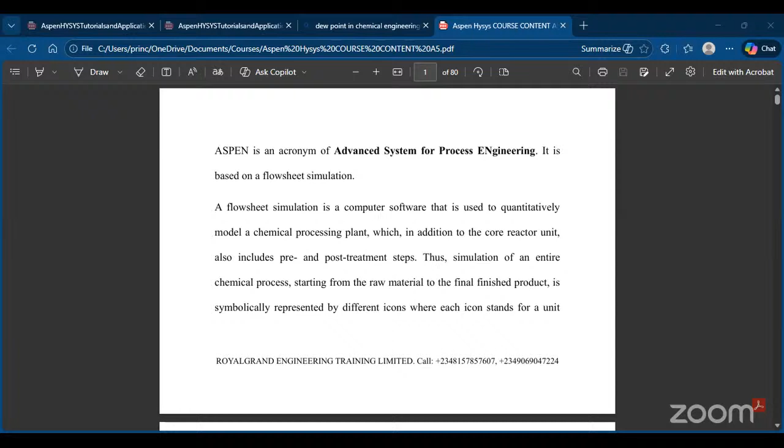Okay, so let's go back to the topic for today, which is Aspen HYSYS. Aspen is an acronym for Advanced System for Process Engineering. It is based on flow sheet simulation. So basically, when you hear about Aspen HYSYS, just know that its principle is flow sheet simulation. Then, what is flow sheet simulation? Flow sheet simulation is computer software used to quantitatively model a chemical processing plant, which, in addition to core reactor units, also includes pre and post treatment steps.

So let's define flow sheet first. A flow sheet is simply the steps involved in a process. For people into software engineering, before you develop your software, you also need to develop a flow sheet. A flow sheet is simply a diagrammatical process of how you solve a problem from start to finish. So in process engineering, your feed, how it moves from the start point, the inlet, up till the exit, where you get your final product. Aspen HYSYS models that. That's why you have your PFD, your process flow diagram. The flow from the input to the output, that's simply what a flow sheet is.

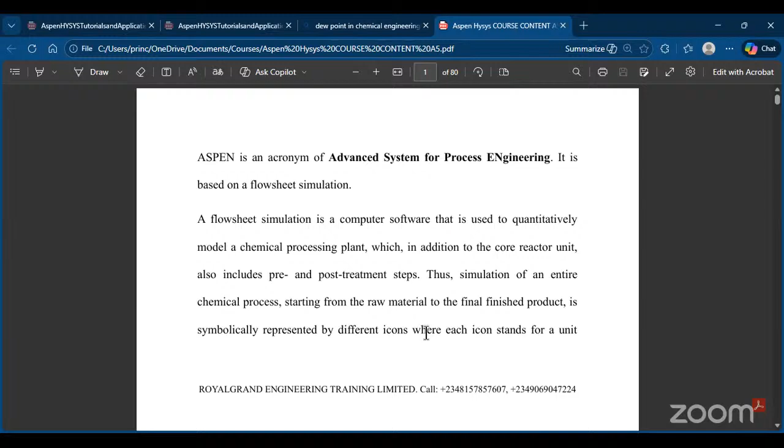And there are different types of flow sheets. You have your PFD, P&ID, utility flow diagram, which is UFD, and there are a lot of them. There's BFD, which is block flow diagram. In CH202 or 204, I think people are supposed to be introduced to process flow diagrams. Okay. So simulation of an entire chemical process, from the raw material up to its finished product, is symbolically represented by different icons, where each icon stands for a unit operation.

Okay, I would like to ask, you are chemical engineers, what's the difference between a unit operation and a unit process? I would like you all to drop your answers in the comment section. Unit operation and unit process. What's the difference? Okay.

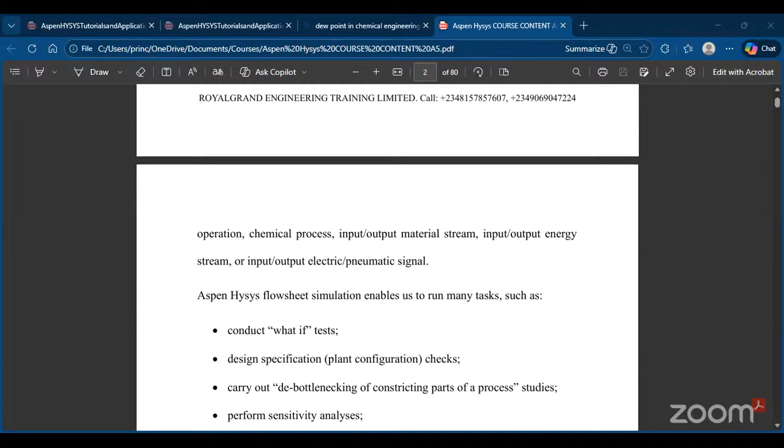Each icon stands for a unit operation, chemical process, input and output stream, input and output energy stream, input and output electric signal. The Aspen HYSYS flow sheet enables us to run many tasks, such as conducting what-if tests. This can be seen in your PSV, pressure safety valves. When developing that under safety, you want to run different scenarios on how your PSV is going to run: increase in temperature, increase in pressure, fire outbreak, what-if tests. You can carry out all those tests.

You can also carry out design specification. Now, when we say design specification, your separator, what is the specification? What was its sizing? You get. So we are actually looking at its sizing. You could also carry out debottlenecking of constricting parts of the process. You could also carry out sensitivity analysis.

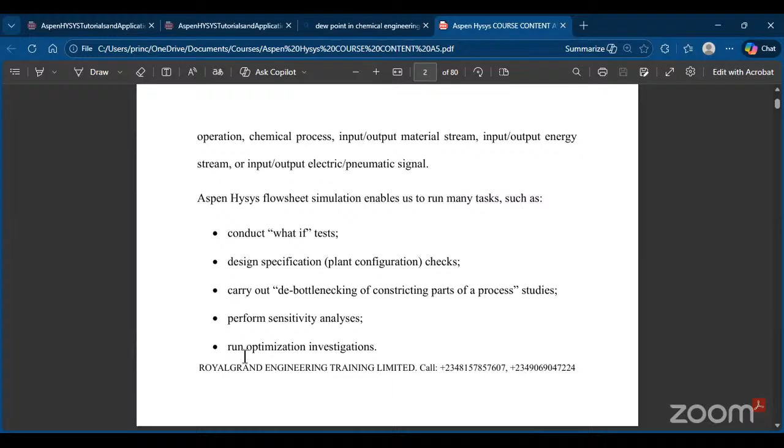Aspen Plus calls it sensitivity analysis. Aspen HYSYS calls it case study, just like what I explained. We want to get 90% purity of methanol, but we got 80%. Sensitivity analysis, or case study, will carry out different iterations on what pressure can give us 90%, or we could vary temperature and pressure to see which of these gives us a higher yield. You could also carry out optimization investigation.

And when we are saying we are optimizing our plant, basically, process engineering is business. So you are getting your feed, processing it so that you get a finished product, sell it, and make profit. So when we want to optimize this system, let's assume we were getting 50% purity. Now we want to optimize this process so that we can get maybe 70%.

The more pure our finished product is, the more profit we get, so the more reputable our firm is. So if you are going to buy gold, one person's gold is, let's assume, 90%. Okay, so let's assume you want to buy gold.

We have two sellers. The first person you wanted to purchase gold from, this person's gold is 80% pure. And there's another seller that wants to sell this gold to you, and his own gold is 95% pure. Which of them are you going to buy from? Definitely the one that has the purer gold. Or let's now assume you have a third person, and this person's gold is 99% pure.

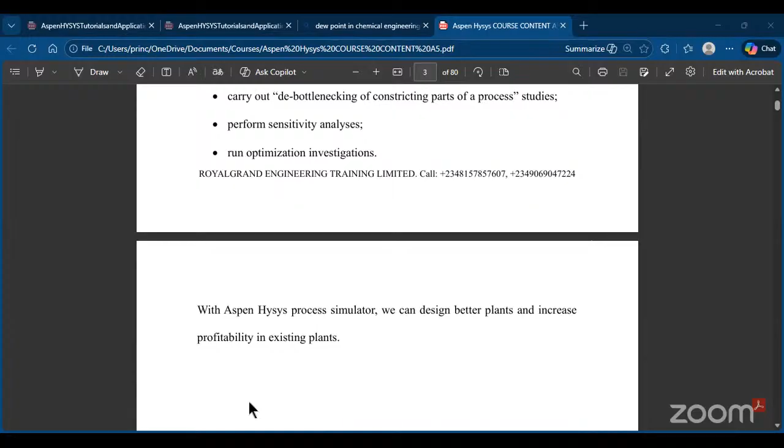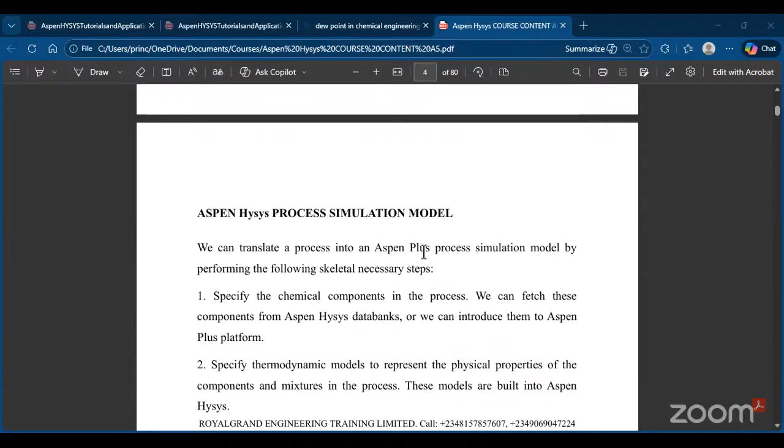So your plant is self-sufficient. That's why you see most oil and gas companies provide their energy themselves. They don't rely on NEPA because some of the waste products or byproducts are being used to power the facility. So we can translate a process into Aspen Hysys, not Aspen Plus, process simulation by carrying out the following steps.

So in order for you to carry out a simulation in Aspen Hysys, there are different steps you need to follow. The first is to specify the chemical components in the process. And how do you do that? You could fetch that from the Aspen Hysys data bank. Just give me a minute. I want to share my Aspen Hysys screen.

Okay, someone said unit operation typically involves physical change, like filtration. Yeah. Unit process is a chemical change. Yeah. So yeah, you guys are correct.

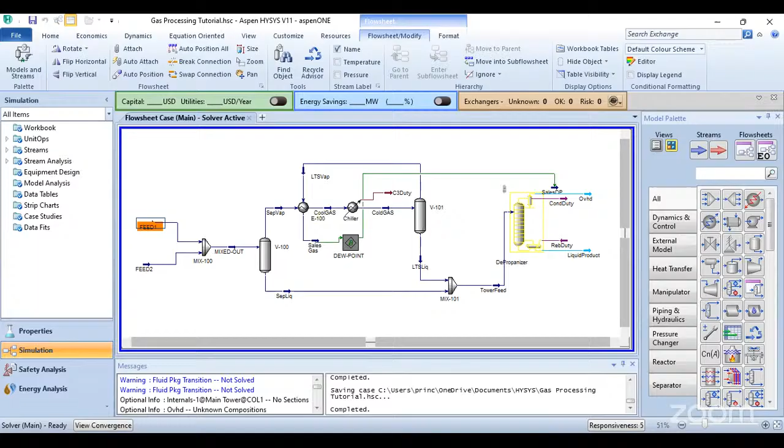Okay, so this is my Aspen Hysys. This is something I was working on, and this is a gas processing plant. So in order for you to start doing this, the first thing you need to do is to specify the chemical components that are involved in this process. And we have the component list here.

So you can see nitrogen, CO2, methane, ethane, propane, isobutane, and normal butane. So this is where you first of all get your components. And we are going to look at all this more in our next class tomorrow: how to add your components, how to specify the rest. So you need to first of all come here, and Aspen Hysys has a data bank of a lot of components.

So if you scroll down, I'm scrolling down, you can see 3M hexane, all these are components. There are thousands of components in the Aspen Hysys data bank. There are a lot of them. And one good thing is if you don't find those components, you could also specify your own components. So let's assume there's a compound you want to use, but you can't find that compound or element here.

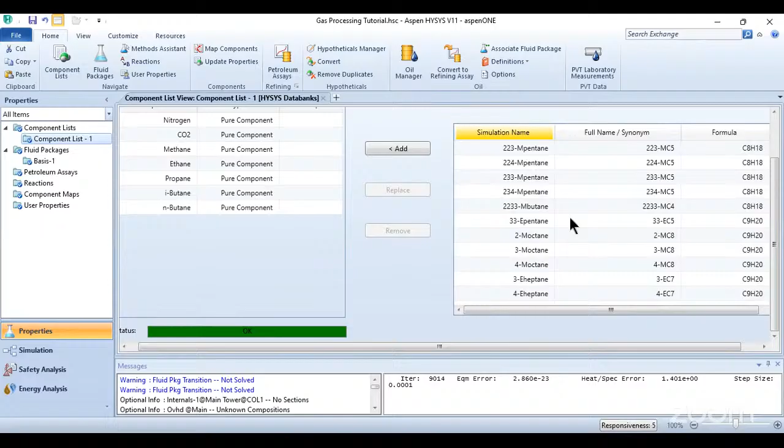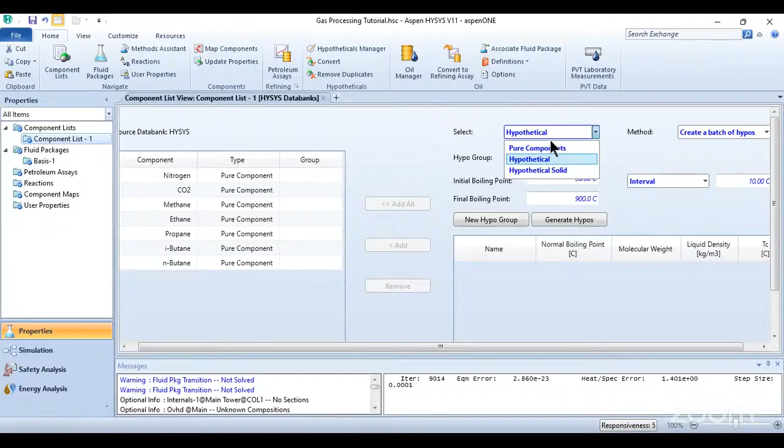With the properties of that element, you could define your own custom-made element in Aspen Hysys when you click on hypothetical components. From here you can specify the initial boiling point; all these are for some other class sometime, not even in this class. I'm just giving you that insight. So the next thing you need to do is to specify the thermodynamic properties of the components you want to use. Back to my slide.

So specify the thermodynamic property of the component or mixture you want to use. These models are also inbuilt into Aspen Hysys. Then the next thing, the third process is for you to define the unit operation in the process. So you could see different stuff.

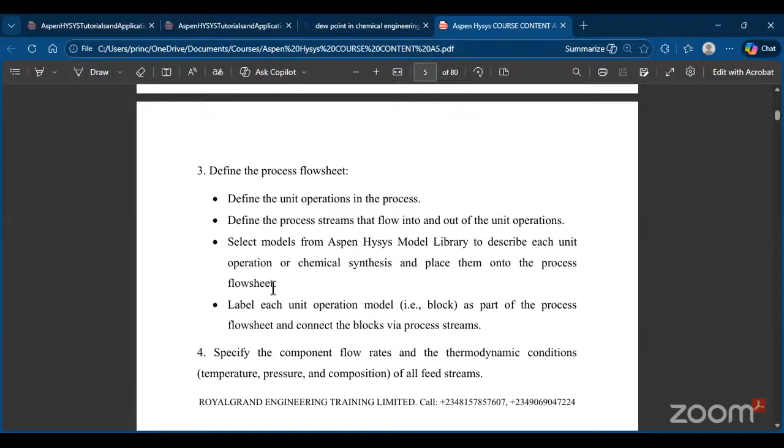So when I say define the unit operation, you need to specify your feed stream. That's your material stream. You specify if there's a heater there, if there's a mixer, if there's a splitter, if there's a separator, if there is a cooler, whatever, you specify all those stuffs. Then you can now label each block, label each unit operation model as part of the process.

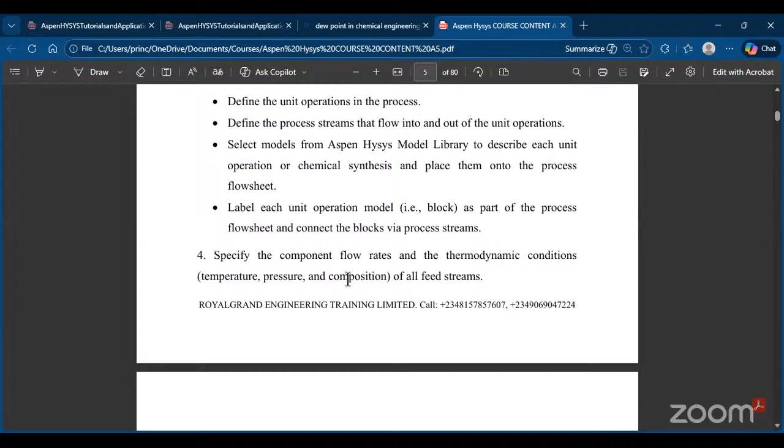You specify the component flow and the thermodynamic condition. So when we are talking about thermodynamic condition, we are looking at temperature, pressure, and composition, flow rate of the feed stream. The next thing we need to do is to specify the operating conditions for each unit block.

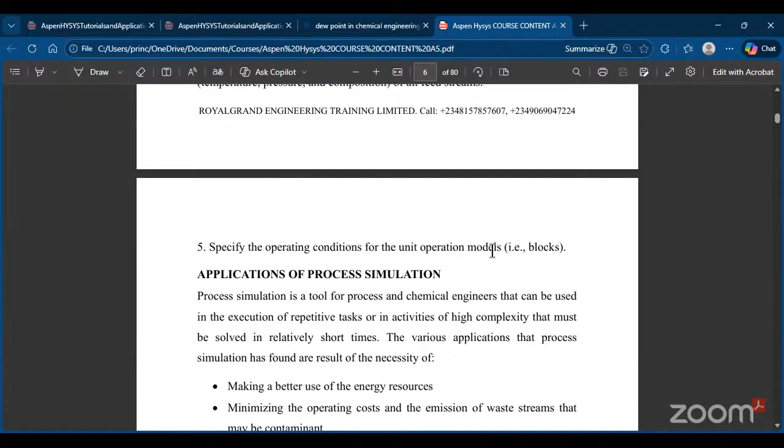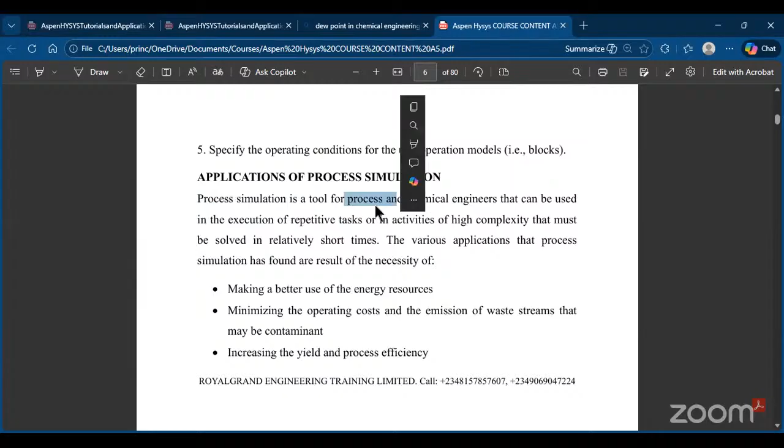Okay, application of process simulation. Process simulation is a tool for process and chemical engineers. You see, process. So when you get into the oil and gas, you'll be hearing more of process engineer, senior process engineer, this process engineer, and little of chemical engineers. Yeah, process and chemical engineers that can be used in the execution of repetitive tasks or in activity of high complexity that must be solved in a relatively short time.

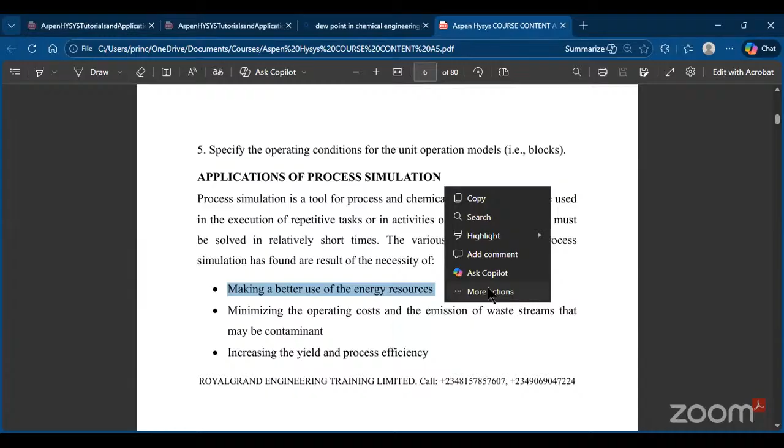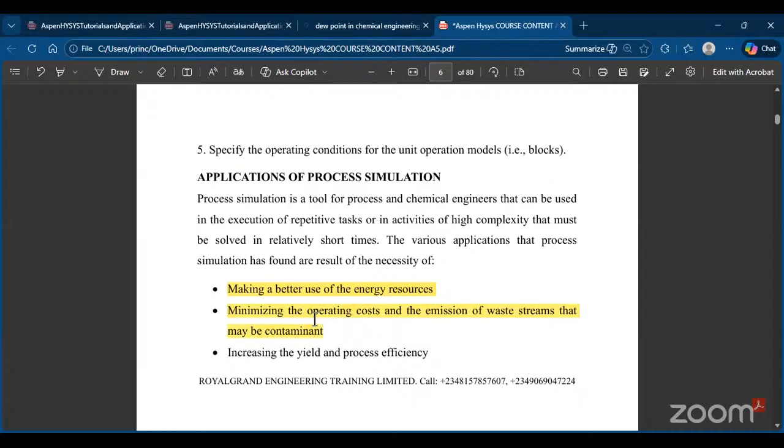The various applications: one, make a better use of energy resources, just like I mentioned earlier that all oil and gas companies produce their power themselves. Why? Because they make better use of the energy resources. They minimize operating costs. All these I have explained before. Increasing yield and process efficiency, I've also mentioned it before.

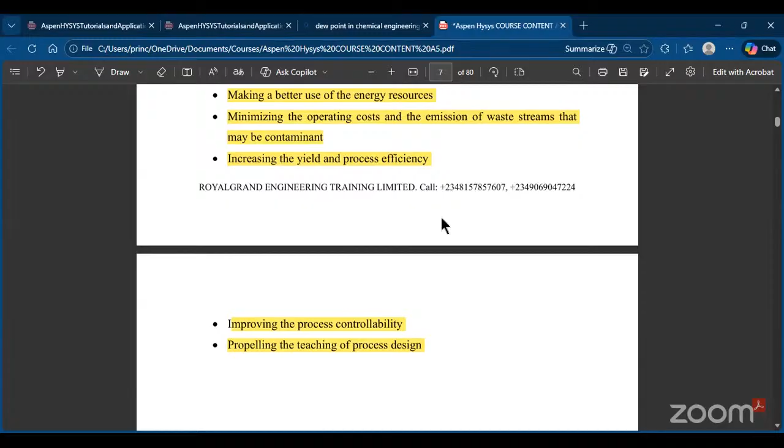Increase the process controllability, propelling teaching of process engineering design, just like what you are participating in now. So there are different file types. All these, I'm not going to bulk you with that.

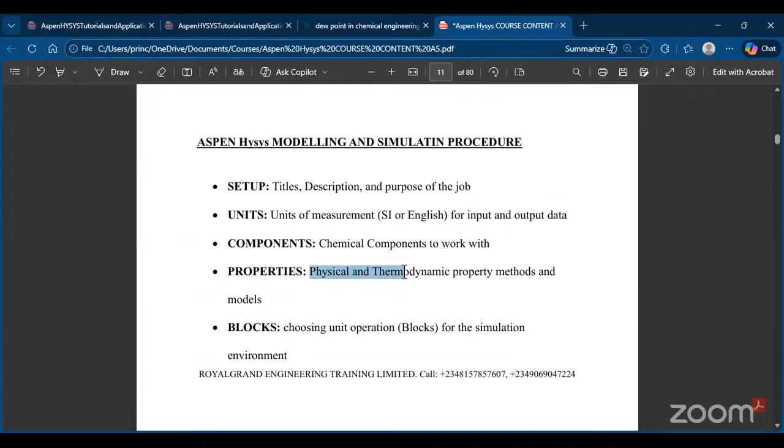Okay, so when you set up Aspen Hysys, the first thing you need to do is to set up your description, title, purpose of the job, specify your component, the measurement units you want to use, the components you also want to use, physical and thermodynamic property, choosing your block.

So before we go into the actual simulation, there is one major aspect of Hysys you need to understand, and you need to understand it at your fingertip, which is property model. If you use the wrong property model, your simulation is automatically going to be wrong. If you are using Peng-Robinson when you are supposed to be using Wilson, your simulation is automatically wrong.

A thermodynamic model is a set of equations that permit the estimation of pure components and mixture properties. In order to represent chemical processes, their modification, equipment, new designs, the selection of a thermodynamic model that represents accurately the physical properties of the substances interacting in such process is mandatory. Please, I would like you to note this. The selection of a thermodynamic model that accurately represents the physical properties of substances interacting is mandatory.

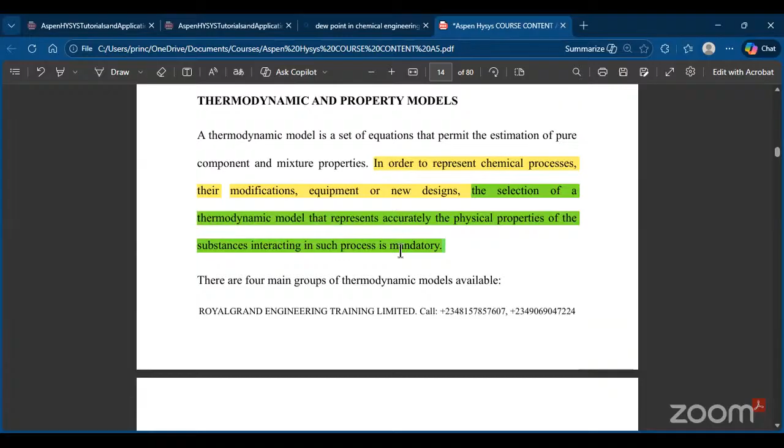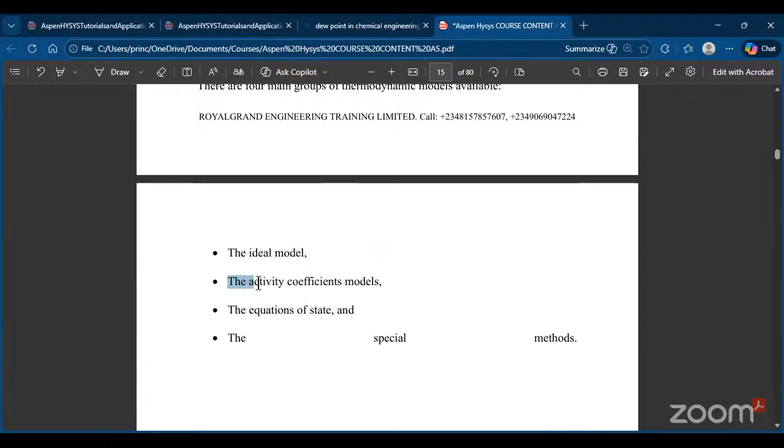There are four thermodynamic models available. We have the ideal model, we have the activity coefficient model, we have equation of state, we have the special method. I'm going to share another slide.

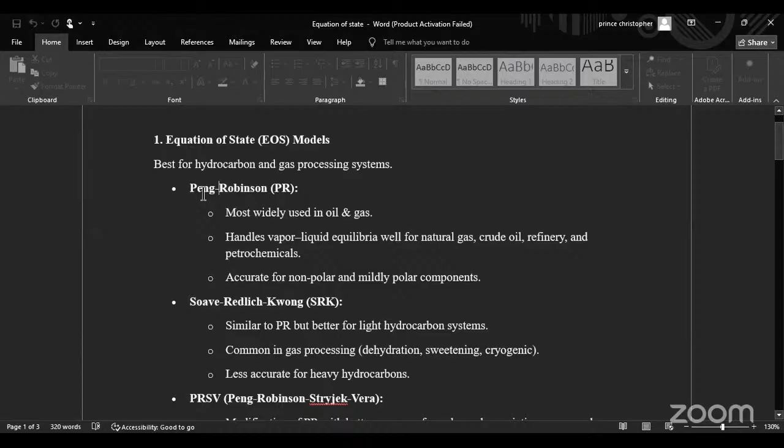Now, if what you are working with is heavy hydrocarbons, Peng-Robinson is the best. If you are working with light hydrocarbons, SRK is the best.

So SRK, similar to PR, which is Peng-Robinson, is better for light hydrocarbons, common in gas processing, dehydration, sweetening, cryogenic. So whenever you are carrying out dehydration simulation or sweetening, just know that I'm supposed to use SRK, or sometimes the client you are working with, or the company, might specify the equation of state model you can use.

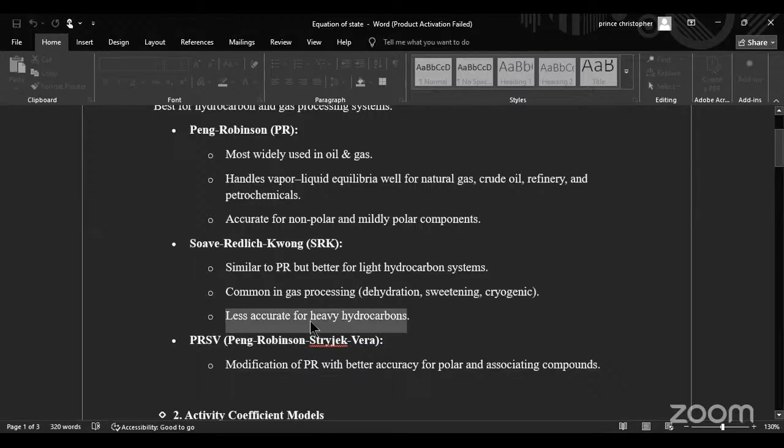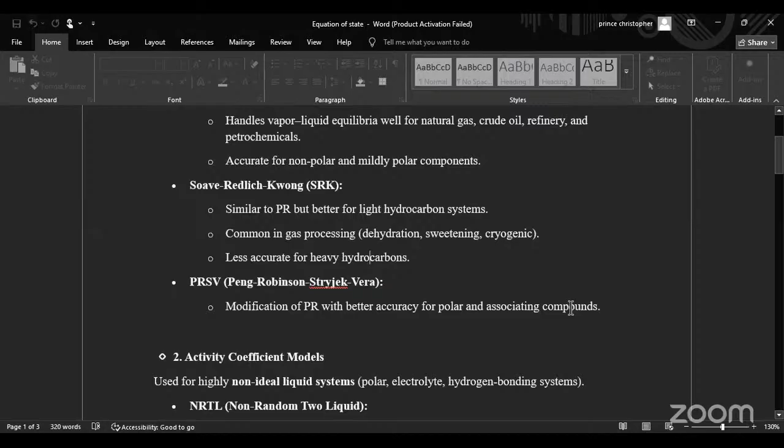So, like I said, it is less accurate for heavy hydrocarbons. We also have PRSV, which is Peng-Robinson-Stryjek-Vera, a modification of PR with better accuracy for polar and associating compounds. We also have activity coefficient models. Okay, so we also have activity coefficient models. It is used for non-ideal liquid systems. For example, we have polar, electrolytes, and hydrogen bonding systems.

So for those of you that are like, okay, what is this guy saying, when we are talking about non-ideal liquid systems, I want to pop up something. Non-ideal liquid systems are mixtures where molecular interactions differ from their pure state, causing deviation and resulting in a non-zero heat or volume change upon mixing.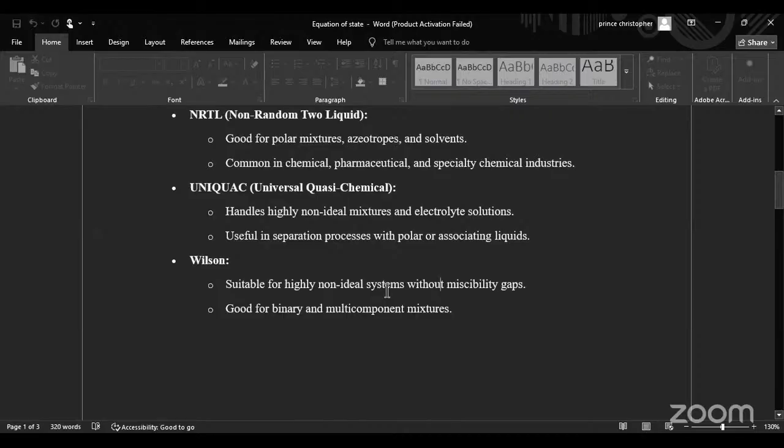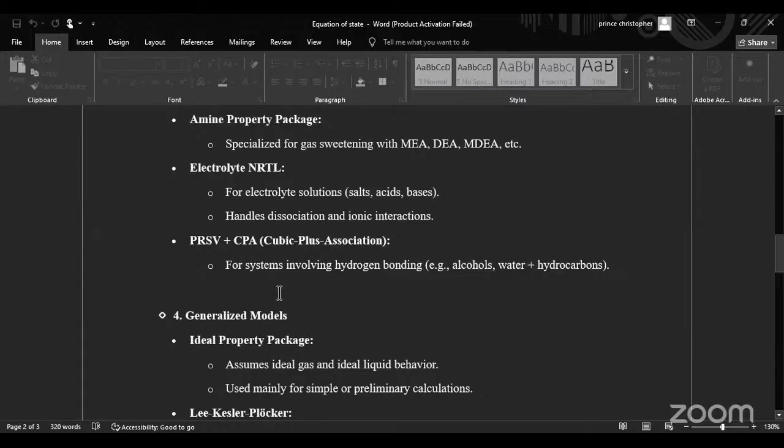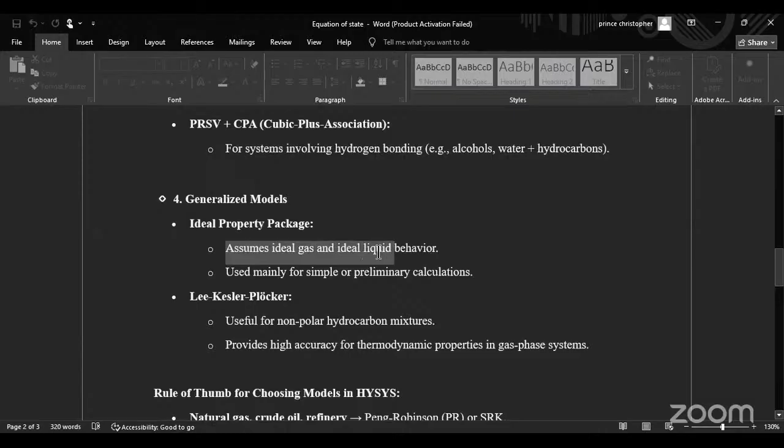So we also have specialized property packages. We have the glycol property package for dehydrating systems. We have the amine package. We have electrolytes. We have PRSV plus CPA, which is cubic plus association. We also have generalized models, which is the ideal property package. This assumes ideal gas and ideal liquid behavior.

So in summary, when we are working with natural gas, crude oil, refinery, what do we use? We use Peng-Robinson or SRK. If we are working with gas processing, and gas processing has to do with LNG, liquefied natural gas, dehydration, you still use SRK or Peng-Robinson. If you are working with amine sweetening, you use the amine package. Glycol, you use the glycol package. Electrolyte, acid, salt, you use electrolyte NRTL.

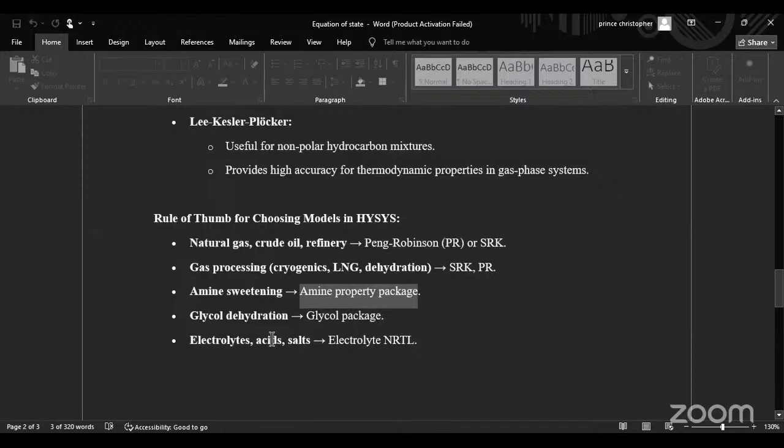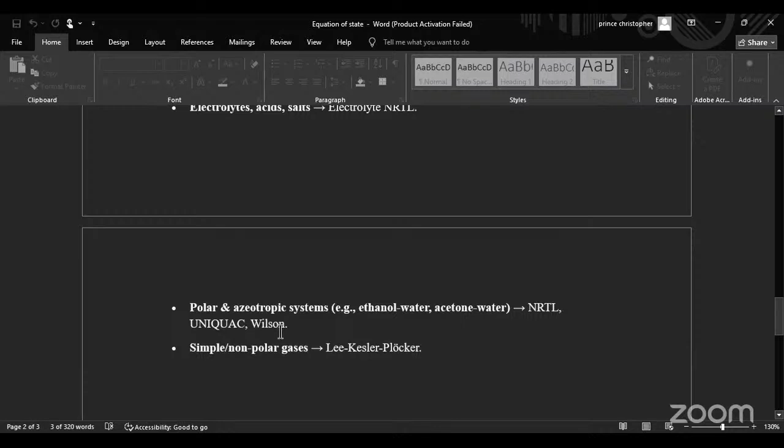If we are working with polar and azeotropic systems, e.g., ethanol-water, acetone-water, what do we use? You use NRTL, UNIQUAC, or Wilson. Then for simple non-polar gases, we use Lee-Kesler-Plöcker.

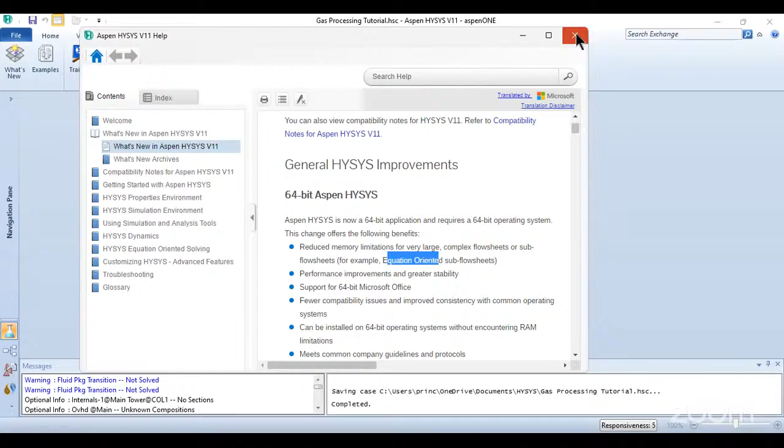So the next one we have is examples. Aspen Hysys has predefined examples, already solved simulations. So if you want to look at a simulation on, for instance, maybe pressure relief system, you can just double click on it. You can see different simulations that Aspen itself as a company has already done, and it comes with the installation file. So you can click on any of these and open it.

We also have training, but for training, we can't access it. This is for those who are using the licensed version. So with this, you can access all Aspen Hysys free training materials, both PDF, video, audio. We also have documentations, but all these are for those that are using the licensed version of Hysys.

Okay. Then we also have events, announcements, all content. Most of them are available for those that are using the paid version. So when I click on file, this opens up, recent model. We can see previous simulations that have been carried out with Aspen Hysys.

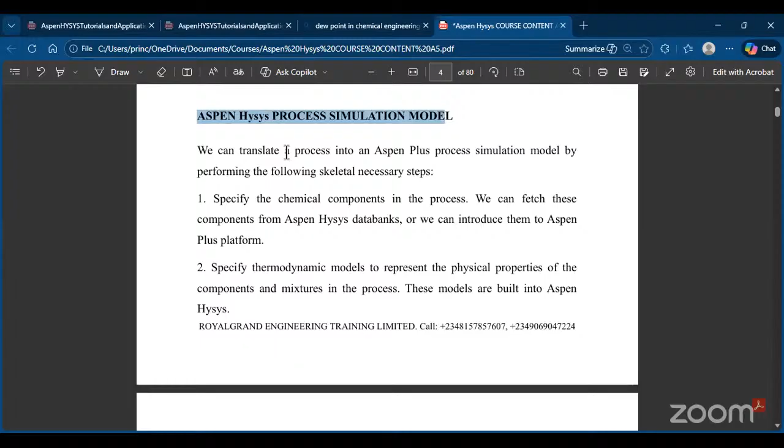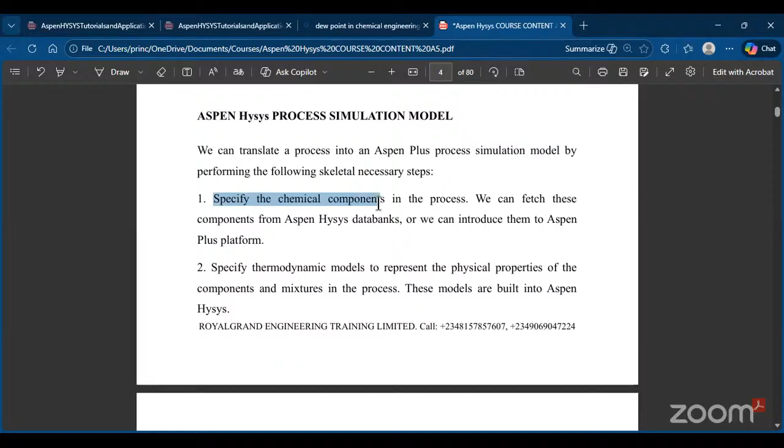I'm going to go back to my slide because there are a few things I mentioned. Now, Aspen Hysys process simulation model. I said we can translate a process into an Aspen Hysys process simulation model by performing the following. One, specify the components in the process. Two, specify the thermodynamic property. That's what I want to explain now, how we do that.

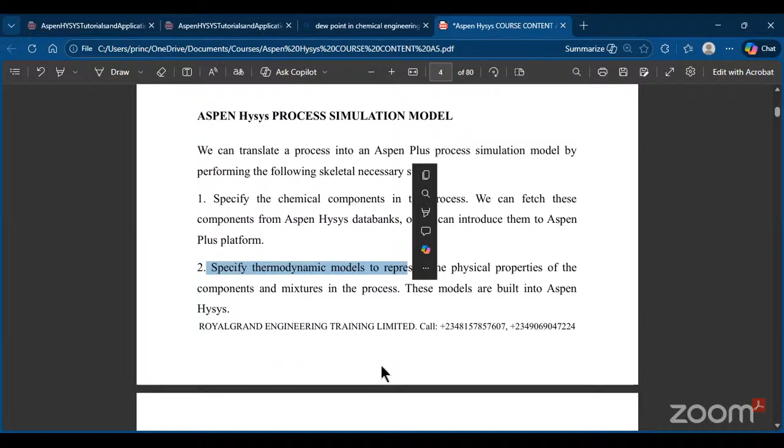So from here, you can see by my left, component list, and we have an icon, a circle, half of it is white, half of it is red. What it means is that there's an error or a warning sign that we haven't specified some parameters. So in order for us to specify our components, we come here and click on add.

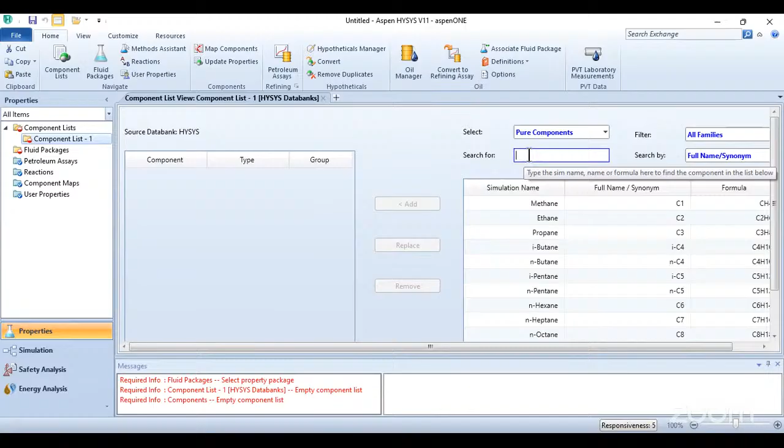I told you that Aspen Hysys has a lot of components in its database. There are a few ways of specifying the component. If we want to add water as the component, I need to type water on the search bar. And you can see water. You can see the simulation name H2O. You can see the full name. You can also see the formula H2O.

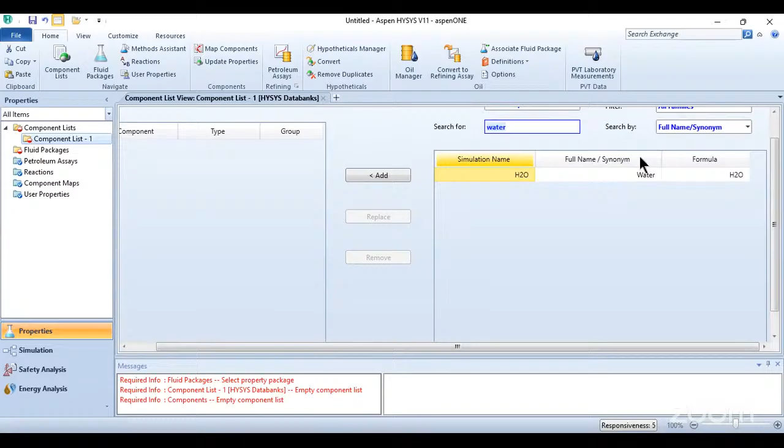Now, if I don't want to use water as a word, I can also type H2O, and it's going to bring that for me, pure components. So what I need to do now is to click on water. Whichever one I click on add, you are going to see it here on my left. I can add methane, see it here on my left.

Can add ethane. Another thing I can do, I can replace. So if I want to replace ethane with some other component, maybe nitrogen, I'll click on replace. It automatically removes it. I'm going to do that again. See, ethane is here. I'll click on replace. Then I can type N2, which is for nitrogen, and add nitrogen here.

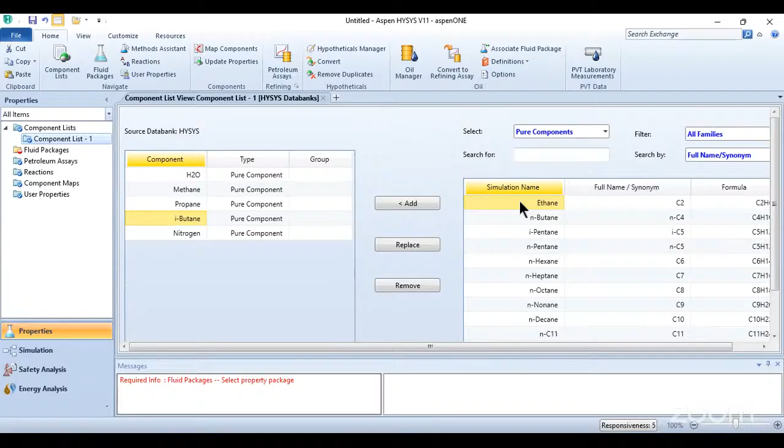I can also add more than one component at a time. So if I want to add more than one component, let me use H2O again. If I want to add all these components that have water, I'll click the first one, hold down the shift key, click on the last one.

Click, then click on add. I can see that I have added all those components.

Next thing I'm going to inform you about is the message dialog box at the bottom. The message dialog box gives you warnings. So if there's something wrong in your simulation, you are going to know that with the message dialog box. Now it says required information, fluid package. I need to select the required fluid package. And also by my left, I can see fluid package with a warning sign.

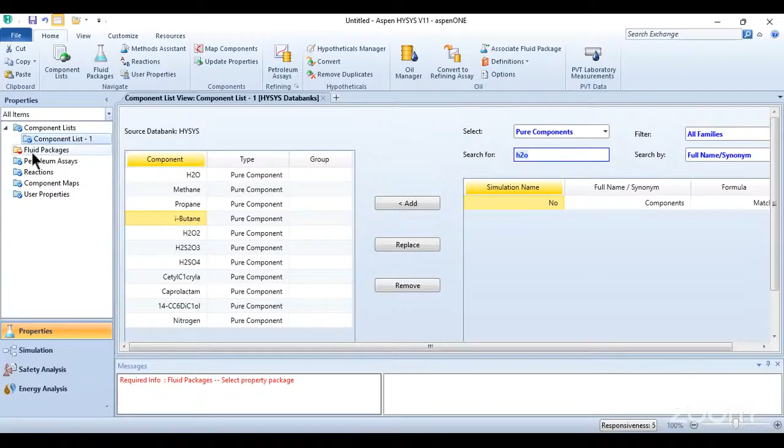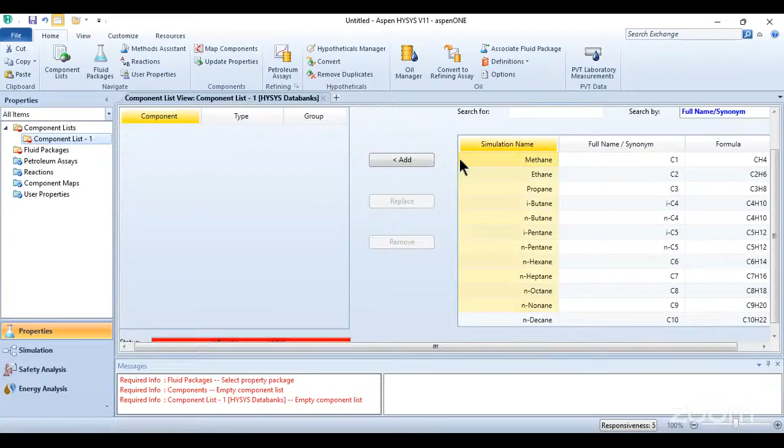You get component list. The moment we select our components, you can see a check mark. A check mark has replaced the initial warning sign, meaning my component list is good to go. I'll click on fluid package. So for this, what I'm going to do, I'll select all these and remove them. I'm going to use hydrocarbons for this. So I'm using hydrocarbons, then I'll select my fluid package.

Now, sometimes you might not know the correct fluid package to use. What do you do in such a case if you don't know the correct fluid package to use? What do you do at that point in time? So what we need to do is to use the methods assistant.

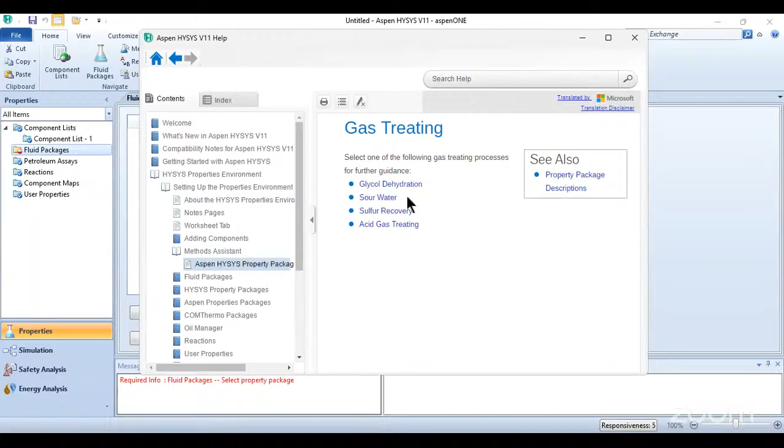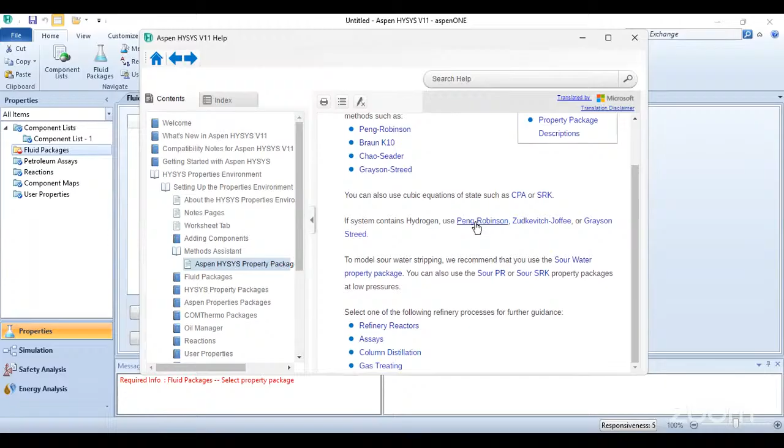What we selected, they are all gases. So I can say gas treatment. So it says select the gas treatment we want to use. No, this is not what we want. So I'm going to come down and select refinery. So you can see all different types of refinery processes under FCC. We could also use assay. But for what we are simulating, our best pick is Peng-Robinson.

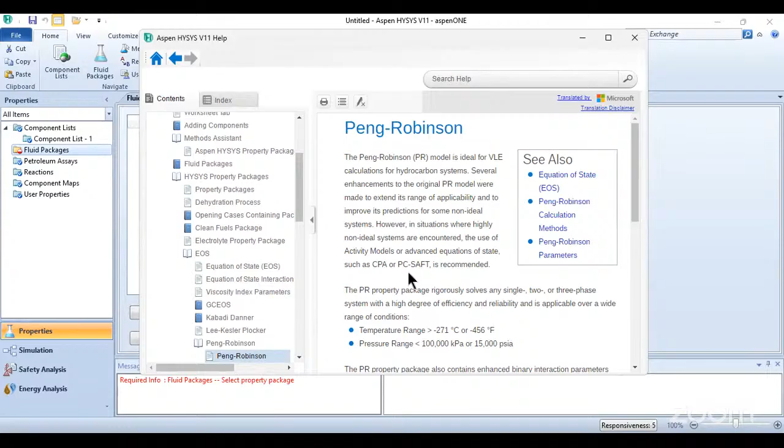Now, I'll click on Peng-Robinson. Under Peng-Robinson, it is going to give us some other information on why we are using Peng-Robinson. Now, the Peng-Robinson model is ideal for vapor liquid equilibrium, which is VLE, calculations for hydrocarbon systems, you can see, very good. Now, under this, there are further reasons why you should use Peng-Robinson.

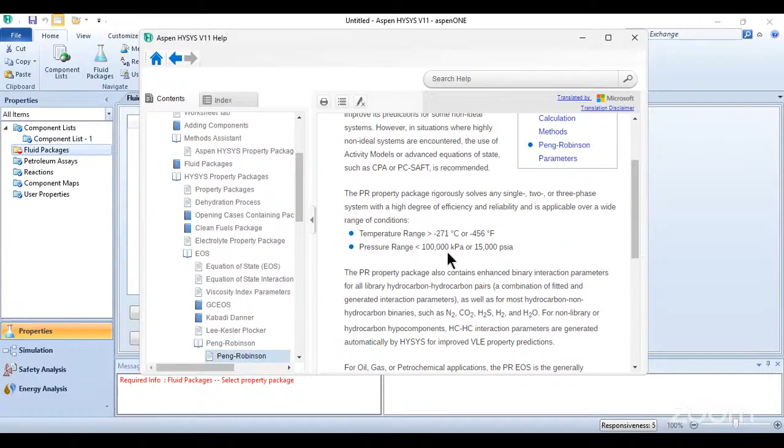If the temperature range is greater than minus 271 degrees centigrade and the pressure range is less than 100,000 kPa, which is kilopascal, or 15,000 psia, you are going to use Peng-Robinson. So it also gives us other areas where we could use Peng-Robinson. So Peng-Robinson, PR, can also be used in TEG dehydration.

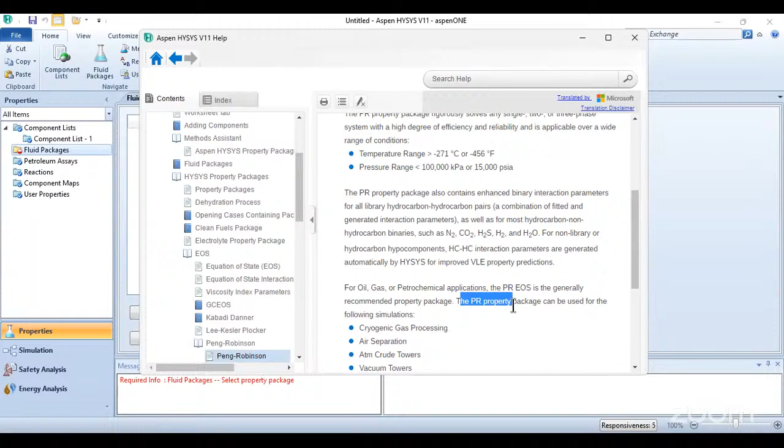The Peng-Robinson property package can also be used for these simulations: cryogenic gas processing, air separation, atmospheric crude towers, vacuum, reservoir systems, crude systems, methanol injection, mercury, LNG processes. There are a lot of them.

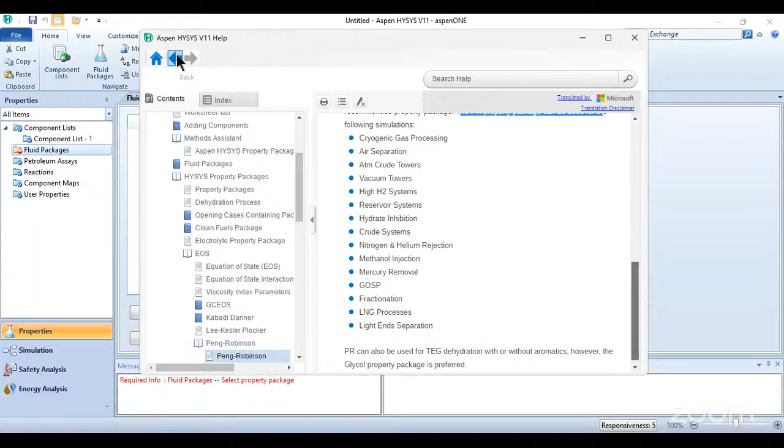So let's go back. Let's click on oil and gas processing. So under oil and gas processing, we still have Peng-Robinson because hydrocarbons are involved. So that's basically it. If you are lost and you don't know the right property package to use, you just need to click on your method assistant and you are good to go. So for this, I'm going to use Peng-Robinson.

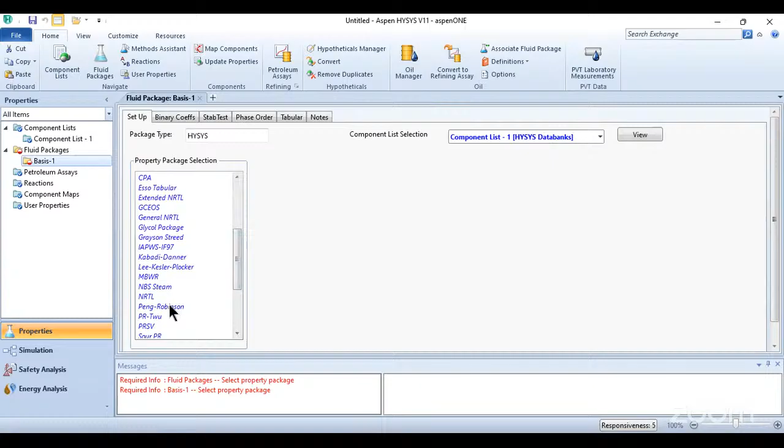Yeah. Now my message section, I don't have any warning, no warning, nothing. I'm going to switch back to my simulation. So in our next class tomorrow, we are going to run a lot of simulations, maybe 2 or 3 simulations.

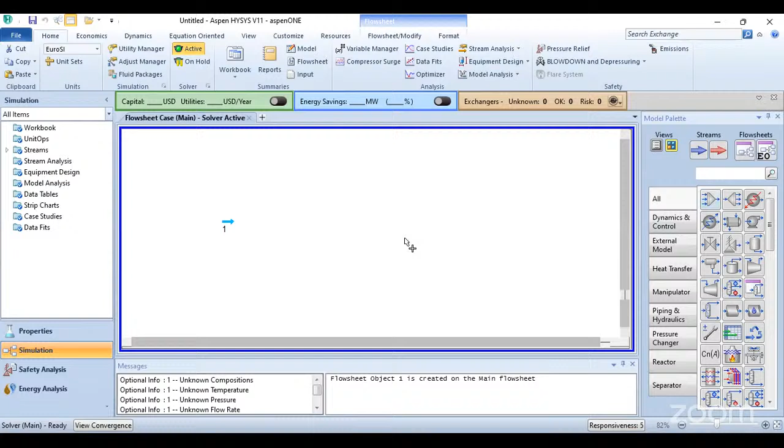So this is your flow sheet environment where you add your material stream, you add the components you want to use, you add your separator and do all your manipulation and all of that. So you do all that here. Now under my message section, you can see that it's giving me a warning. It says required information for V100, which is my separator, my two-way separator.

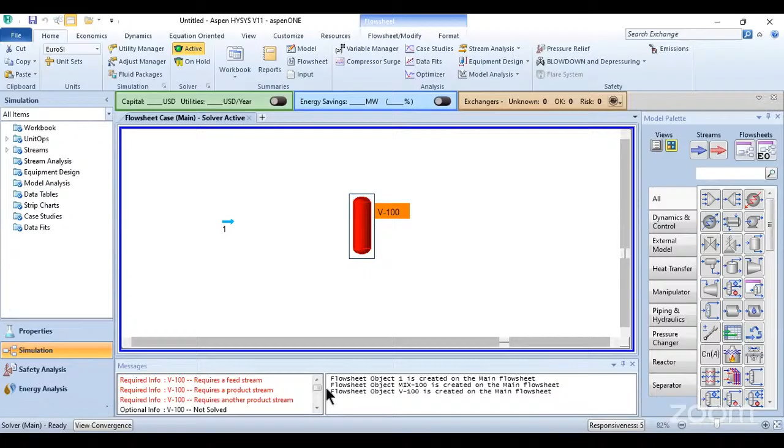It says required information for product stream. This is a two-way separator, so it needs two streams to be specified. It also needs an input stream, which is the feed stream for this. Now, if I double click on this and select my feed stream, now the feed error has gone off. What is now required is products and another product stream.

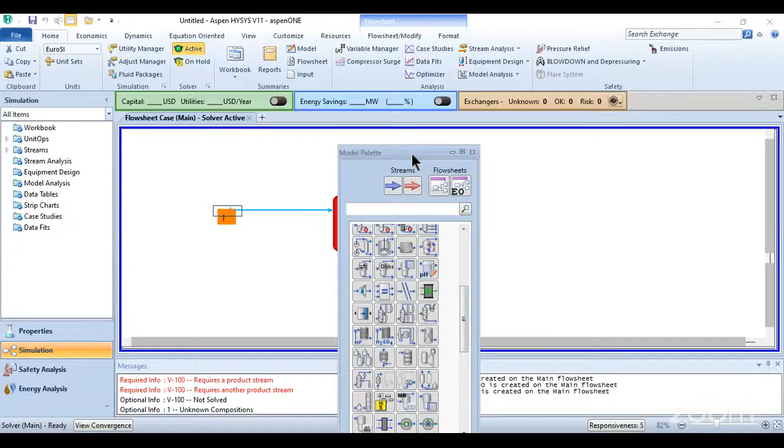Okay, so this is my model palette here. It contains the information or the process units necessary to carry out your simulation. So you can either pick or search for them. You can type heater and you can see different types of heater.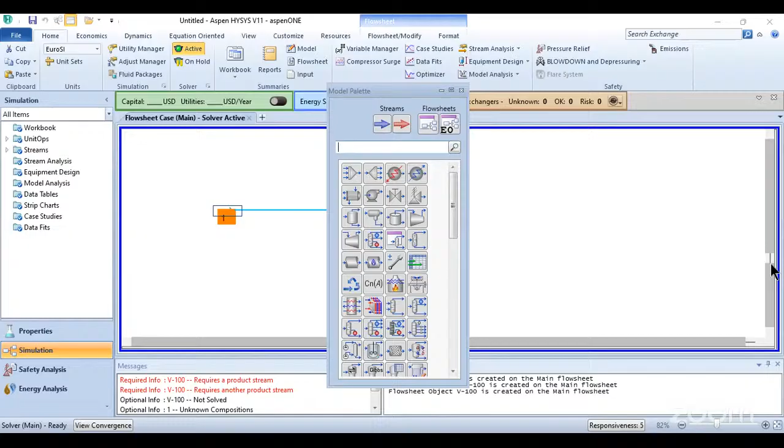This is the furnace. You can type cooler. You can type separator. You have different types of separator. You can type mixer and what have you. Just select all of them, and you can also sort them by category. We have separators. When you click on separator, you're going to see all the separators listed here.

You can also click on your distillation column, absorber, reflux absorber, reboiler, what have you. They are all here. You have 3-phase separator, you have 2-phase separator, you have your tank. You can carry out all those simulations. We have your reactors, your continuous stirred tank reactor, which is CSTR. You also have your PFR, which is plug flow reactor.

You also have your conversion reactor, the equilibrium reactor, Gibbs reactor, the yield shift reactor, and all of that. So all those things you have been learning in chemical engineering and solving, you just need to click 2 or 3 buttons and you have solved all of them. So please, if you have questions, I would like you to ask.

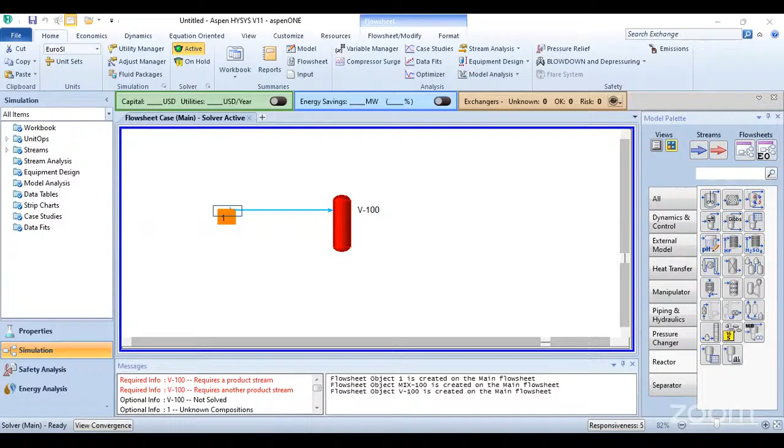Okay, let me check how many persons are tuned in. I told your president that if we don't get a good number of persons attending this class, tomorrow's class is not going to hold. So for today's class, we have 14 likes. Okay, that's good. And how many persons are live? 52 persons. Okay, that's also good. So tomorrow's class is going to hold. Just give me a minute.

Okay, back to HYSYS. So we have pressure changers. Under pressure changers, we have your pump, valve, your relief valve, which is pressure relief valve, PRV. We also have compressors and expanders. We also have piping and hydraulics. Under piping, we have mixers, tees, pipe segments, and all of that.

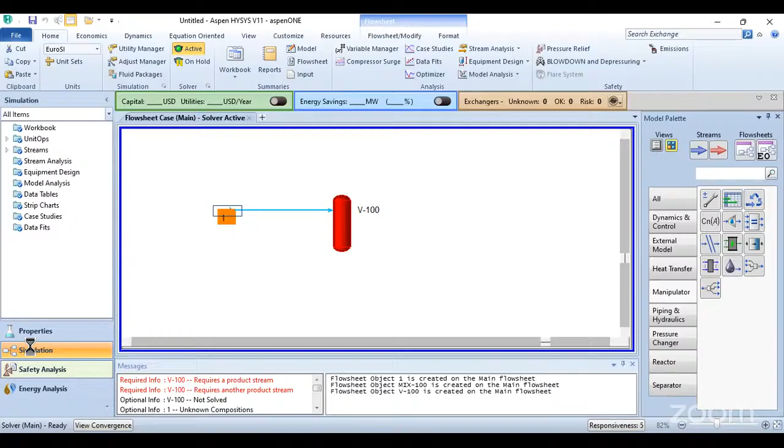Okay, so thank you all for participating in today's class. But before we end today's class, I want to introduce you guys to safety analysis. Safety analysis is directly under your simulation. Safety analysis is basically where you carry out safety simulation on your process, which is where you start adding your PSVs, your pressure safety valves, basically for safety.

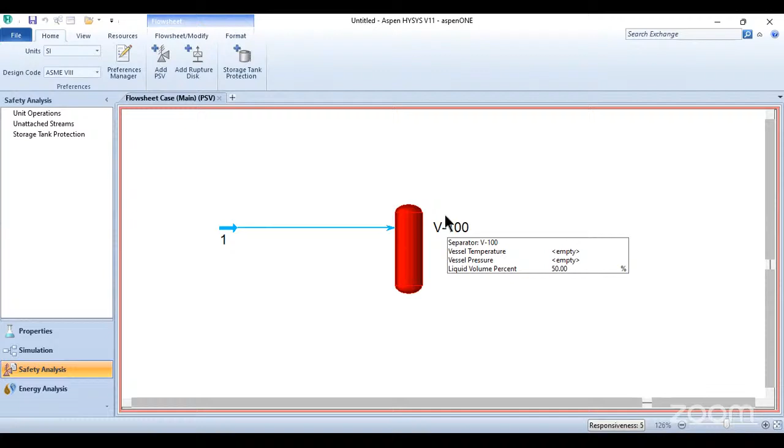And process engineering is actually broad. There's the aspect of commissioning, process safety, detailed engineering design, equipment, and also the simulation aspect, where you can be called a simulation engineer using HYSYS and maybe FloSim, OLGA, PIPESIM, and some other software out there. So you could also carry out safety simulations in HYSYS.